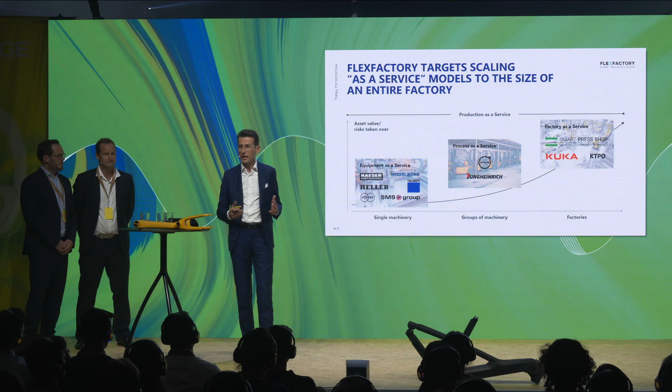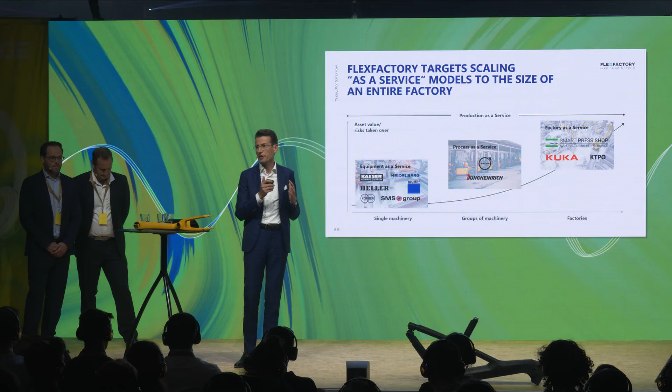Production as a service can be a solution, and you will certainly have heard about several examples in industry. They always focus normally on the first step, on a single machine, on a single plant - equipment as a service, this is the slogan, like Trumpf and so on.

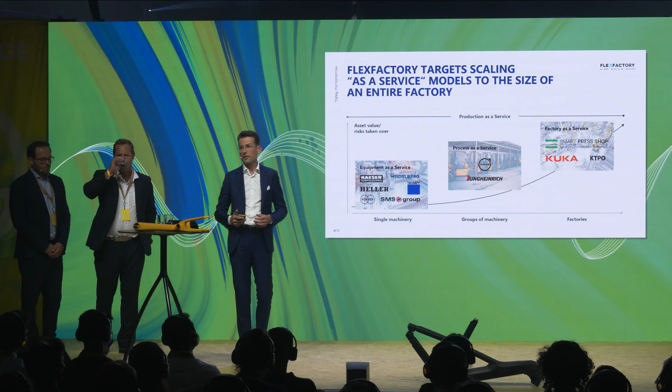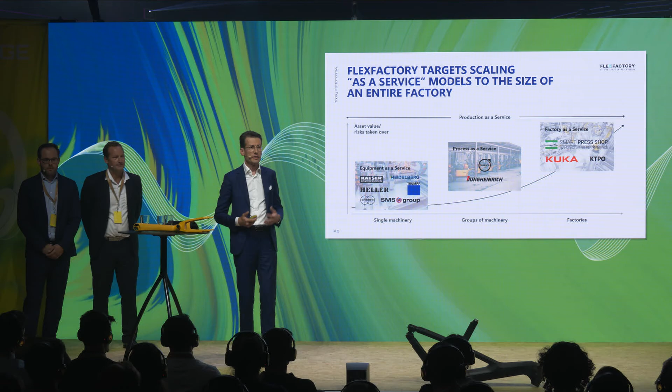But then there is the next step towards production processes, logistics processes, and for us as FlexFactory, it's even more interesting to take this further step and offer services for a complete factory. There are already some examples, but only a few in practice.

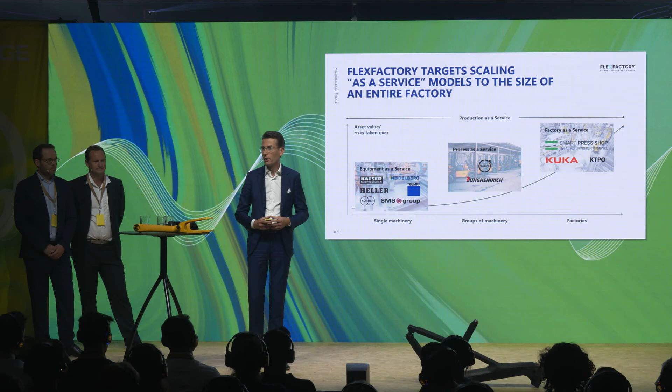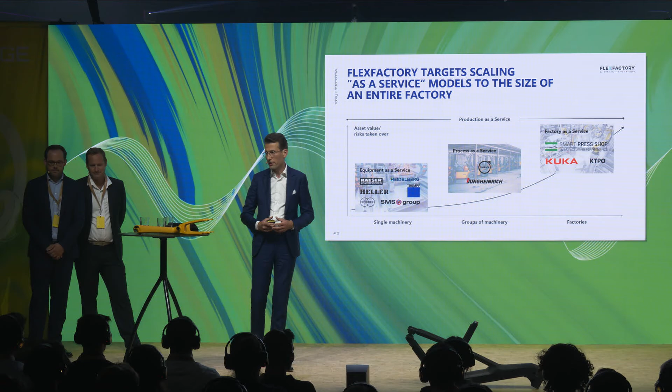And we can say, yes, this is possible. What do we need, actually? There are three enablers. But before we talk about the enablers, I would like to emphasize one sentence that can describe this.

Production as a service: you need a highly flexible plant, a factory. Second, this is then owned by external investors, not owned by the manufacturer. And there is a split, so several users can use this infrastructure.

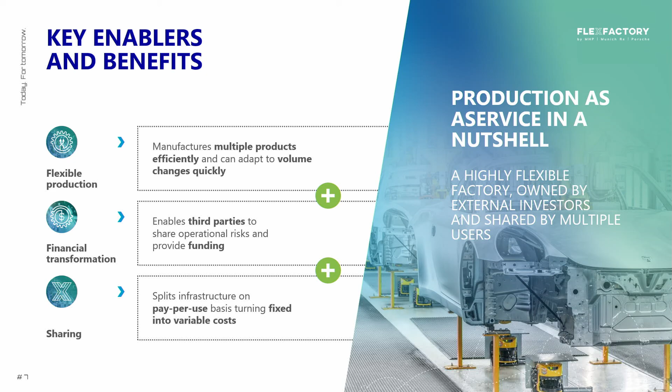So this is then flexible production, and it's possible to manufacture several products on one line very efficiently and to reduce the risk of variations. And CapEx to OpEx - this is also a slogan.

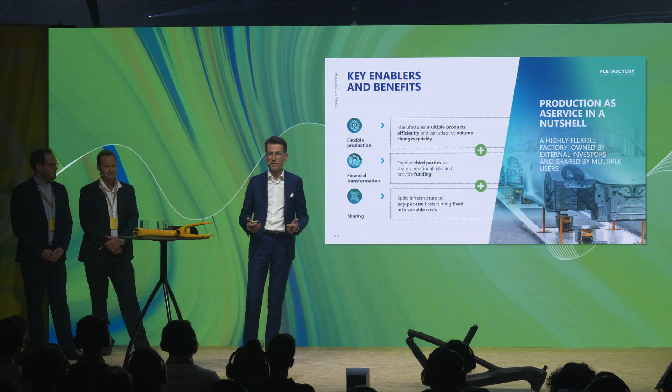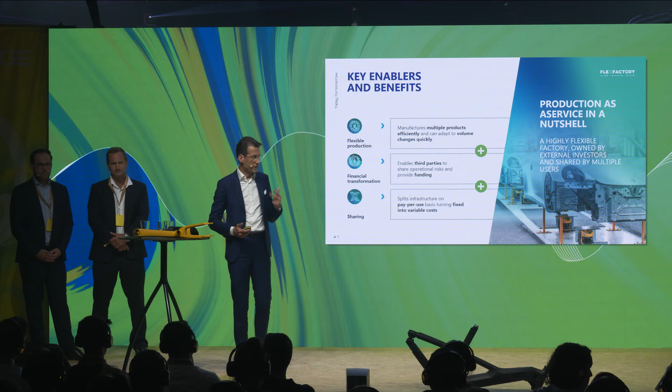How can we manage that? How can we make the fixed costs more variable? How can we split this and refinance this? And the third point: it's about sharing production lines with several users, and so finally distribution of risk and a better risk profile, and higher investments than it would be possible for a single user.

So let's not just talk about theory, but rather about practical examples. We would like to present VFrames, and it's great that we can cooperate with this company. Here is the managing director. He will give you an overview of what we are doing with VFrames and MHP. We have already worked on several projects. Thank you, Philip.

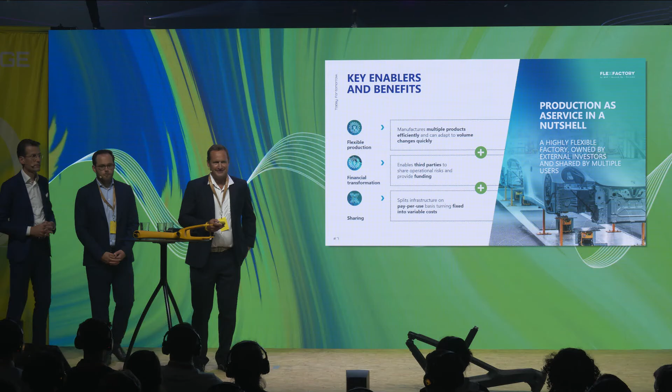Ecological sustainability is one of the main drivers, and this is why the mobility sector is growing, and the e-bike sector is growing at the moment. There are investments in industry, but actually, nowadays, the frames are often built in Asia, with a lot of manpower and energy needed. Then the frames are shipped back to Europe for use, and they end up in a landfill, sometimes in China. This is not a good ecological approach.

There are approaches, but these have existed already for 30 years. And now there is a new method, the injection molding process. But sometimes this was tried in the past, and they didn't achieve the rigidity, or it was too soft. So what do we do?

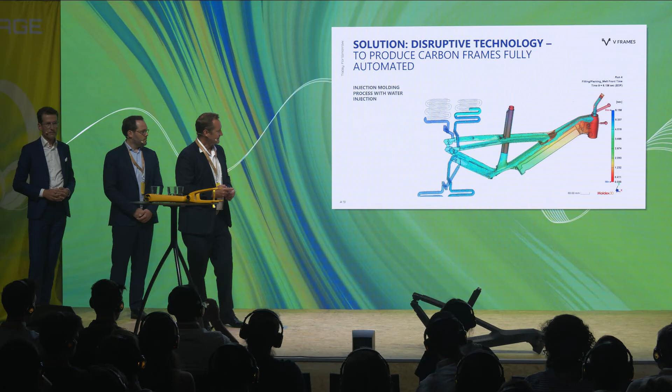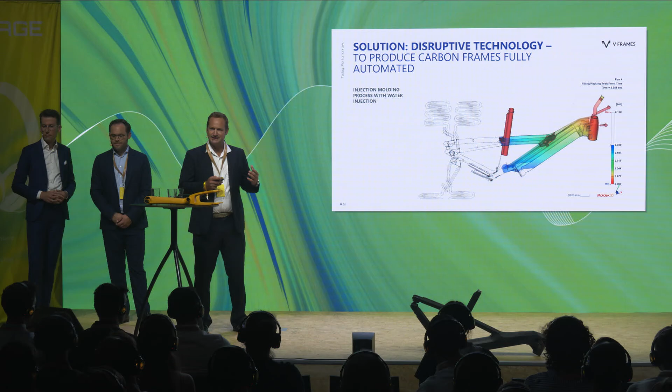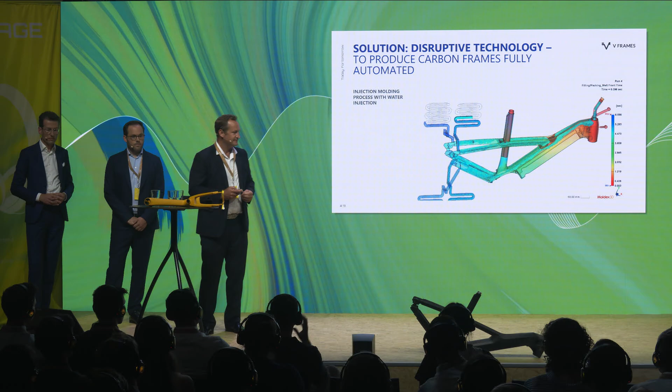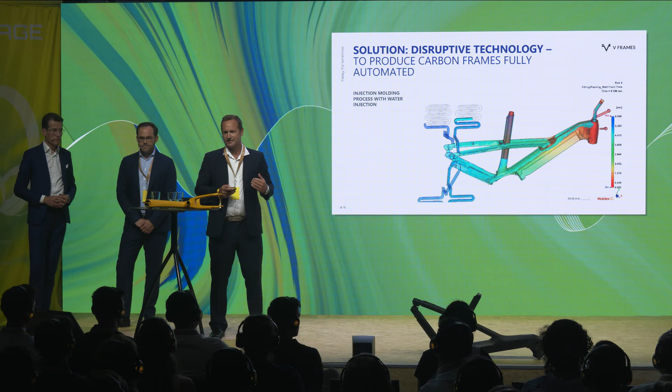What is our solution? In the last 7 years, we developed a method, and now we have a new injection molding technology. We have the material in the mold at a temperature of 280 degrees with a liquid core, and we press on this core. We have these overflow cavities, and then a cavity geometry, and so we can produce this frame. We have a great material, polyamide, with high rigidity and low weight.

If it works well, this is really perfect. It's fully recyclable. Actually there are two arguments. The material we produce and the frames we manufacture are made out of fibers from the automotive industry. So they are reused, and at the end of the life cycle, they are remelted, and we can use the material for new frames. So a high circularity, high recyclability of the material, that's the basis of our technology.

At the same time, we can reduce the CO2 footprint in production by 80%, according to a study carried out by the University of Linz. And by using solar cells in our factory, we can even achieve a CO2 neutral frame production in Germany.

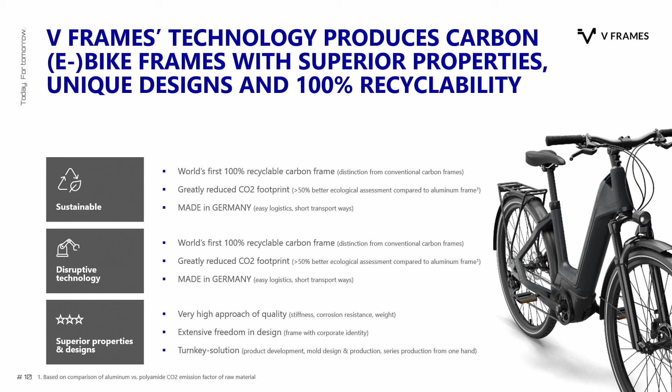It's the first fully recyclable carbon frame because there are no thermoset materials, and we have materials that can be better recycled. We have a better CO2 footprint, and we do everything in Germany. We produce this in Germany, 1,000 frames per day with one operator, fully automated in our plant. 1,000 frames per mold per day, and a mold has got a lifetime of 1 million shots.

It's a top-level quality. You have a look at this, as you can see, but it's high quality. The mechanical properties are excellent. Later on, I will come back to that.

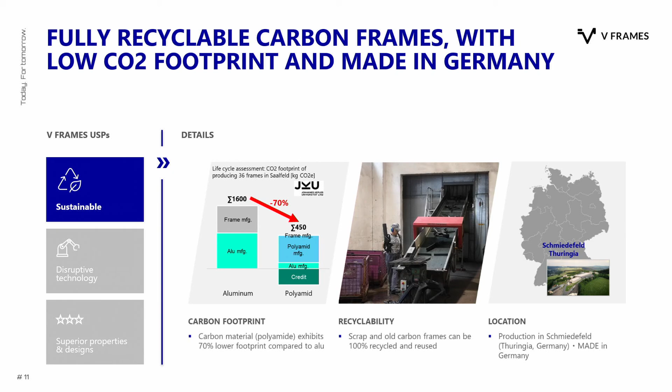Once again, the ecological footprint. As I said, we reduce the CO2 footprint from 1,600 kilograms to 450 kilograms, and at the end, the material is milled and can be reused for the manufacturing of frames. We manufacture this in Germany, so there are no transport routes from Asia to Europe. It's manufactured just in time. We do not have to order the frame 1 year in advance. We can produce unlimited quantities.

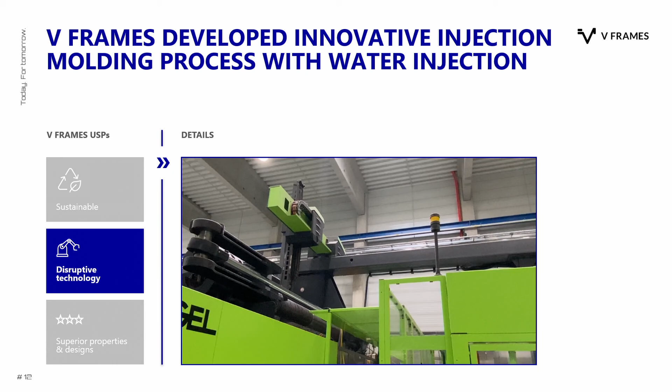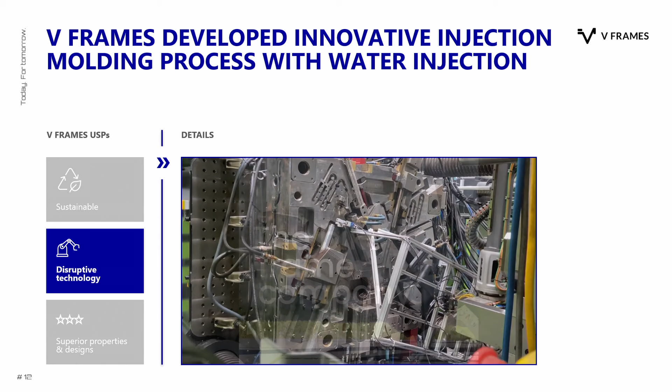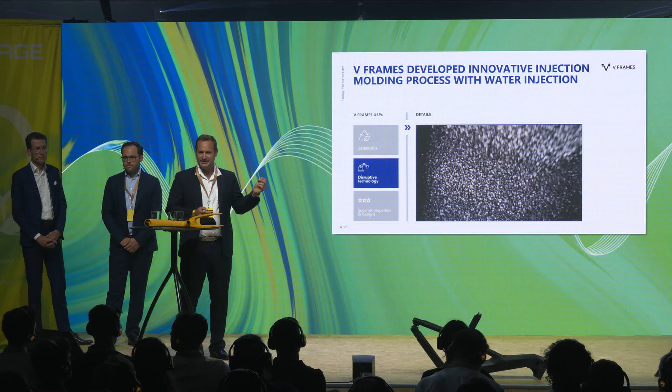Here you can see briefly the raw material: short fiber granules, polyamide with carbon fibers coming from the automotive industry.

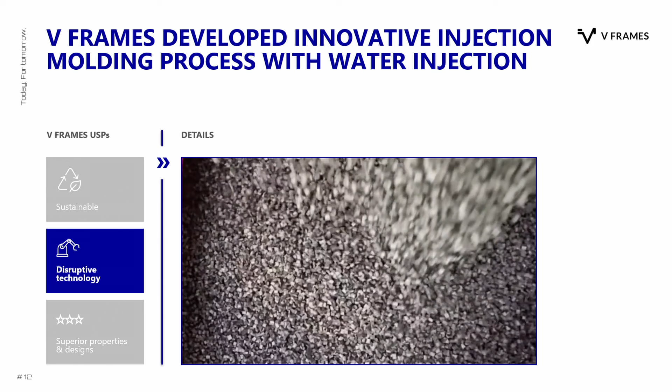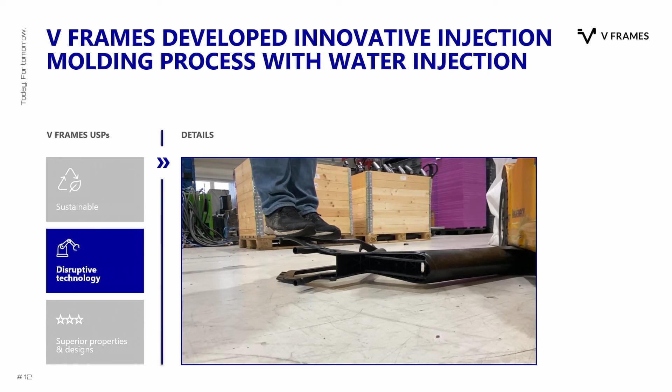And let's talk about the properties as well. It's a flex material, a very flexible, elastic material, which guarantees very good driving behavior. It's well insulating, and even shocks or impacts are well dampened and smooth. With 100 kilograms, you can see this test, so it's very resilient.

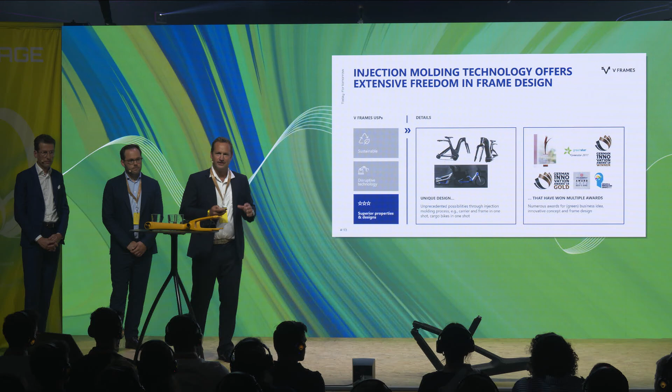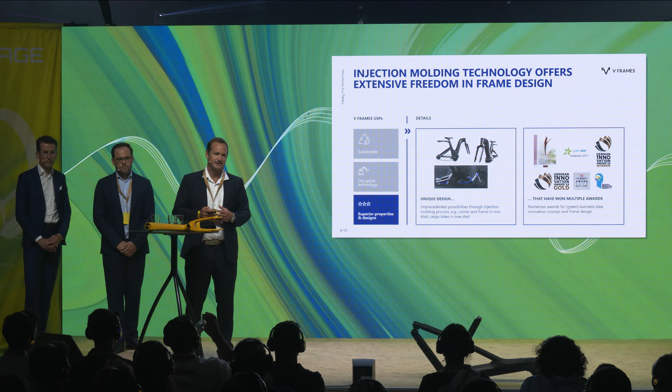What can you do with it? All the bicycle designers love that, because with this injection molding process, you can create superb surfaces. You have so many geometries, top surface quality, engravings are also possible, functional integrations. We can also include carriers, and within this project, with normal injection molding machines that are available on the market, we can manufacture a cargo bike in one shot within 2 minutes.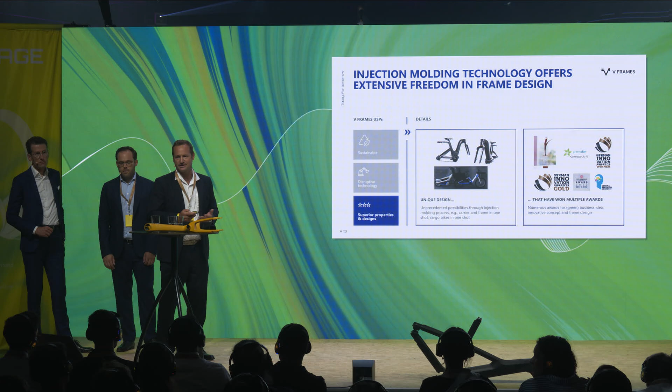You can integrate sensors, have very complex geometries, some real novelties, something that is brand new and that was not possible before. And we have won several awards with the first bike. It's very advanced. You can see the frame here. We got the German Innovation Award and 5 further awards.

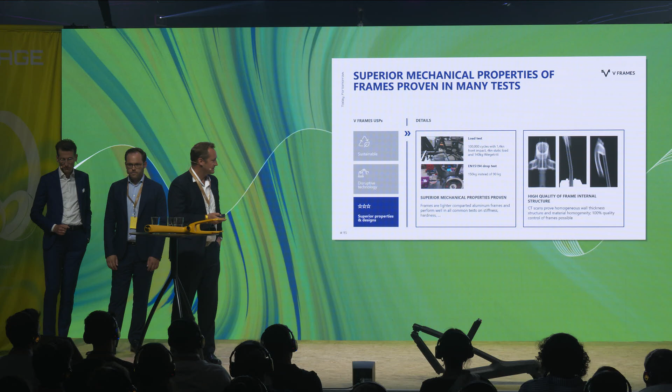And quality assurance. I would like to talk about the quality of the frame.

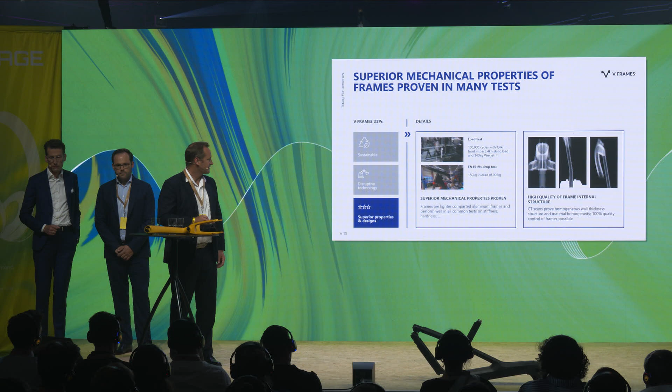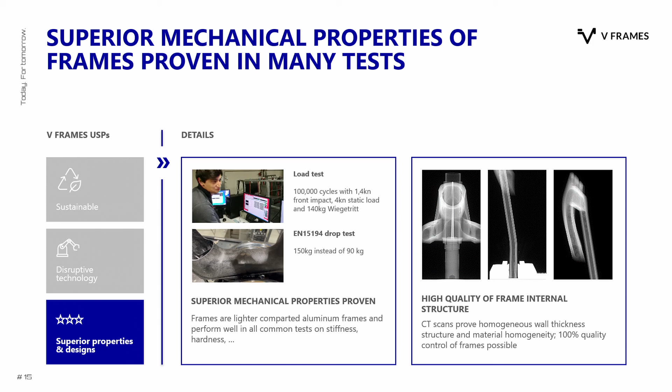And when it comes to the digital twins that we plan for the factory, the frames are taken out of the mold, they are marked, they get a number, then a scan is carried out, so the quality can be documented, and in the digital twin the information is stored, so that we can document the quality for each frame. Very important after 10 years, for instance, to see whether the parts are fine or whether they pose a risk.

It took quite a while, 6 years altogether. It also cost more than expected, and we could convince major companies to develop frames with us. At the Eurobike, 3 frames are presented. Next year we will have 8 different frames, and I give the floor to Julian because he will talk about the new plant, because soon we will manufacture 1 million frames with 30 operators in Thuringia in the east of Germany and can relocate some production from Asia.

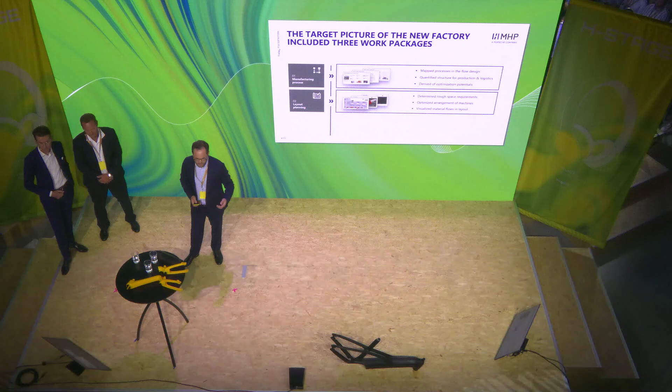Thank you very much. So in the end, the question arises how MHP can provide support to FlexFactory for this flexible production. In the first step, we had to develop a technical concept, and within 6 weeks, the team could define 3 important core levels. First of all, we had to define the production sequence, the steps from the delivery of raw materials to the product, and then the total layout of the company was defined, the positioning of the different machines and the spatial layout. Then we developed a business case to derive the investment for this flexible factory.

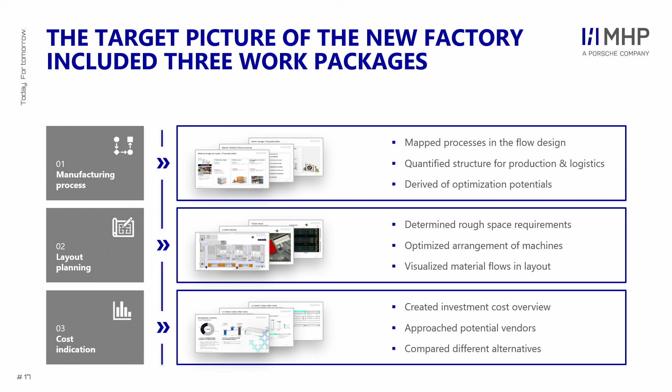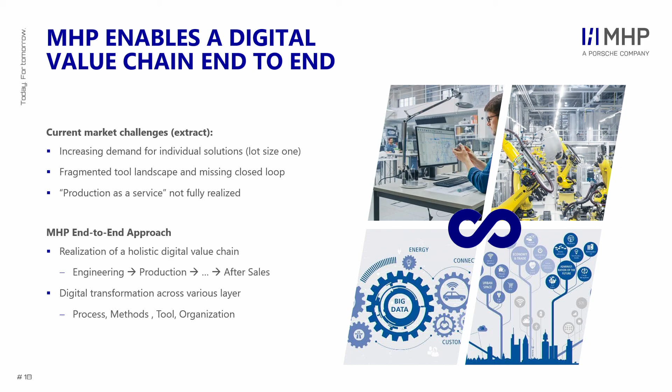And in the next step, we now have to develop a digital concept. So we evaluate the steps that are necessary for development and which steps can be digitalized, because we always want to have a consistent digital value stream. And this is actually the core of MHP. We support our customers, flex factories and partners. We support the implementation of this consistent value stream.

So 2 approaches are very important. First of all, the horizontal consistency. We take into account all the processes from the raw materials to after sales, but also vertical integration. Besides the tools, we take into account the processes and the business aspects. I hope that we could give you an idea of this approach and how it could be implemented at the customers. Thank you.